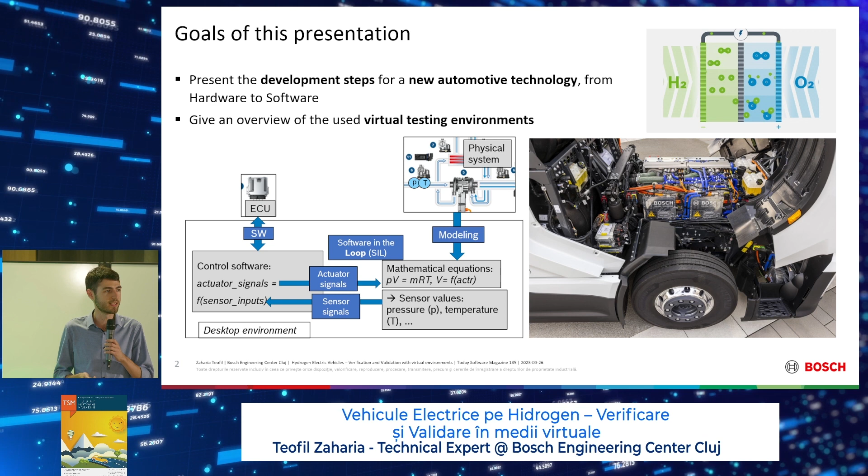The first point of our presentation is the great wonder of the 1950s: we can produce electricity from hydrogen and oxygen using a small electrical device called a fuel cell. Who of you knows this? Okay, few of you. We can also produce energy by burning everything - that's much more spectacular, but this is a very clean way of producing electricity.

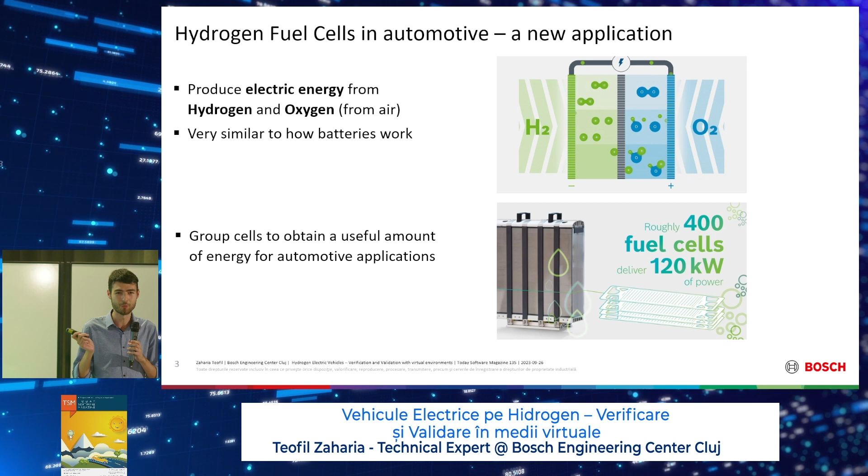And we just get water out of it and we don't produce CO2, so very green. They are very similar to batteries. What we can do is group a lot of cells like we do with batteries, and generate a useful amount of energy for vehicles. We did exactly the same thing with lithium-ion batteries, so nothing new up until now.

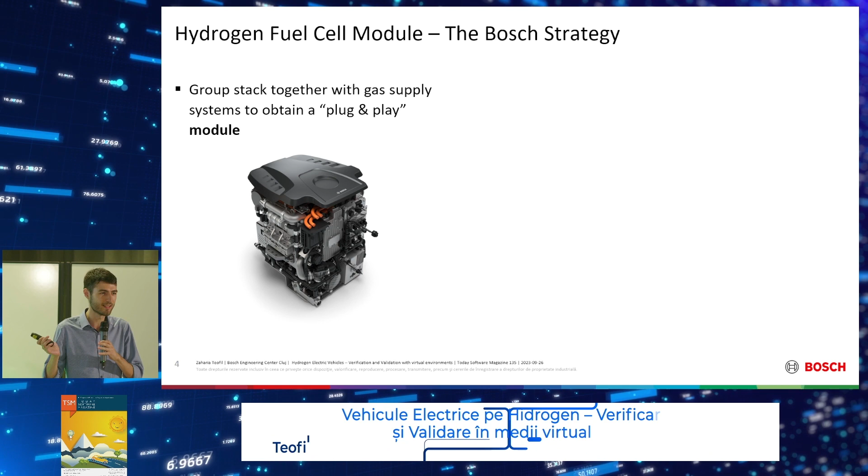But now we're getting to the really nice part. We can group all the systems together and get an engine, like for a vehicle. It's modular, and you can put it in a car and just sell it like this. Here you see one of the final results - that's an Iveco truck, you can look that up on the internet. Here you have the Bosch module, just put inside, and you get electricity. Just a module that generates energy. So it's a wonder, right?

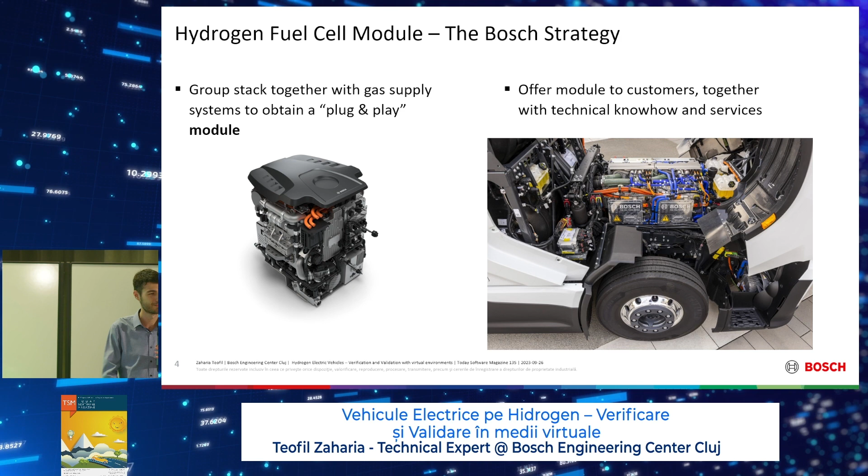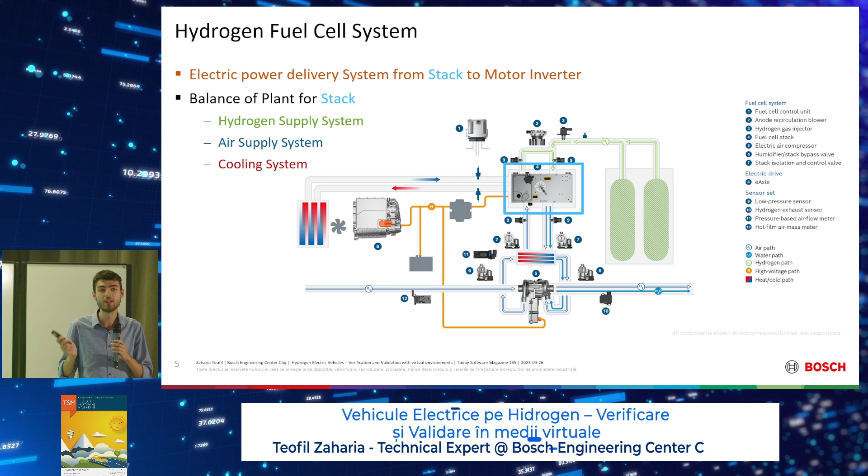Next, we have the air supply system. As said, you need oxygen that you get from air - it's very useful to live on Earth because you have oxygen in the air. Hooray for Earth. And then you need a cooling system like for an engine - this heats up really bad, like in a combustion engine, so we also need a traditional cooling system. In total, very similar to a diesel car - you have air, you have cooling, but what's new is the hydrogen.

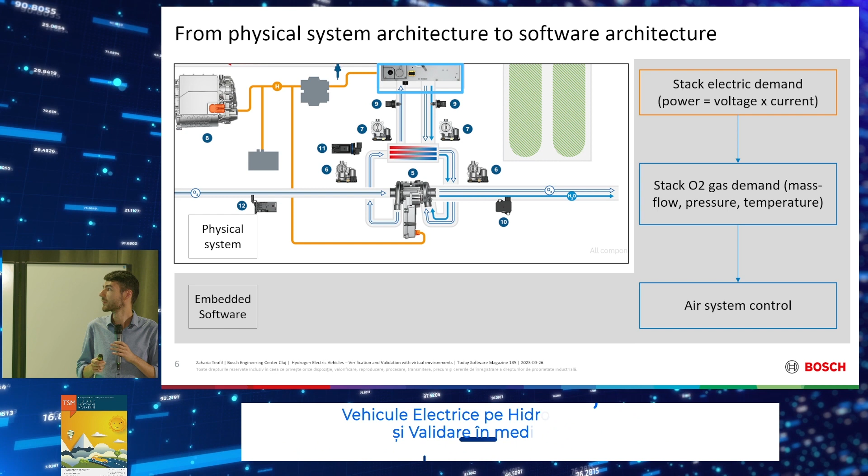Now we have the physical system. Next, we need to talk about software - it's today's software magazine after all. What's really different from maybe your field is that we have embedded software here. The final goal of the software is to control the physical system that has a lot of electric actuators.

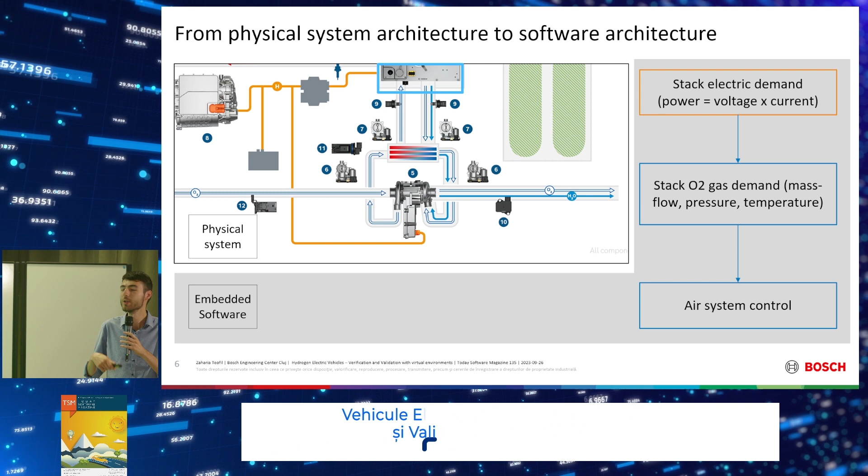Who of you is familiar with the term actuator? Okay, not enough - electric motors. Who of you is familiar with electric motors? Okay, thank you. So we have a lot of small electric motors inside the whole system that we can control with our computer.

There we have a software architecture diagram. At the top we have the main request to produce electricity. From that we determine the amount of oxygen and hydrogen - here in this case we have the case for oxygen. From there we determine the amount of air we need to produce enough electricity. From this we can command individual components.

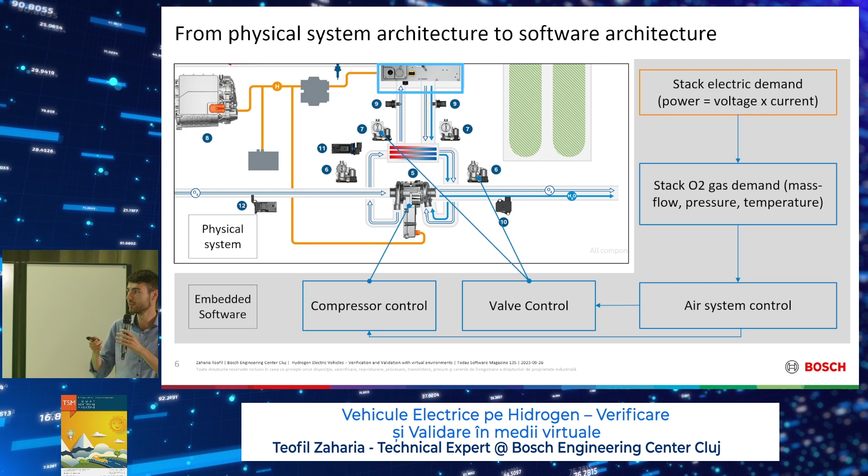Here we have the compressor - it's okay if you know what a compressor is, it's just a fan that blows air, basically. And we have valves that control the airflow to the stack. In general, we make a subdivision in the embedded world where we have component drivers and application software. But it's just another way of saying we have more abstract software and software which deals with the hardware parts.

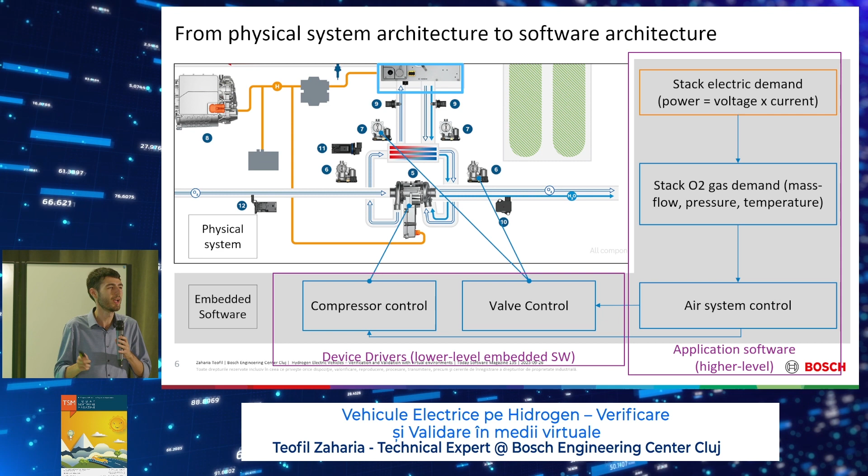So this would be the software architecture and how it controls the physical system. Everyone okay with this? Yeah, okay. It's like in the classroom - if one is okay, then everyone is okay.

This is our dreaded V cycle in the automotive world. This is how we develop software. It's a top-down, bottom-up approach, similar to normal software, where you do the architecture first and design the modules, and then you start implementing and testing. It's a little bit closer to waterfall, where we design the whole system at a big level compared to normal agile that you do in software.

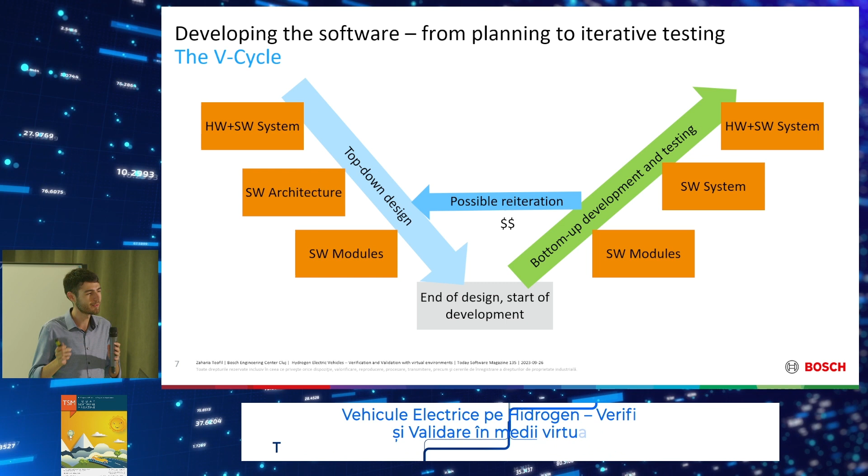But there's always the possibility for reiteration. What does reiteration mean? You spend money - spend money on developers redoing stuff because it wasn't okay the first time. It's great stuff, always happens. Good type of reiteration: you just need to redesign a module, something didn't go well at the lowest level, and that goes fast.

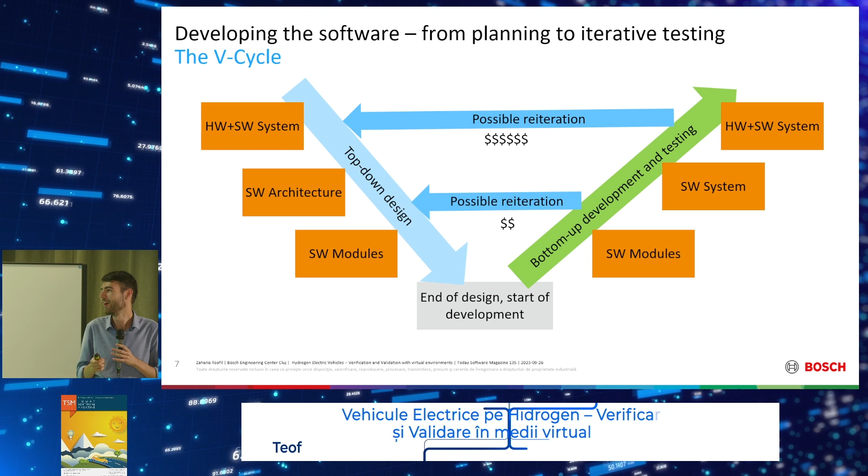Bad case of reiteration: you misinterpret the client requirement and you have to redo the whole thing from scratch. I see some people are laughing - I hope you don't have this experience. Okay, so best case you don't do this, but yeah, we live in the real world.

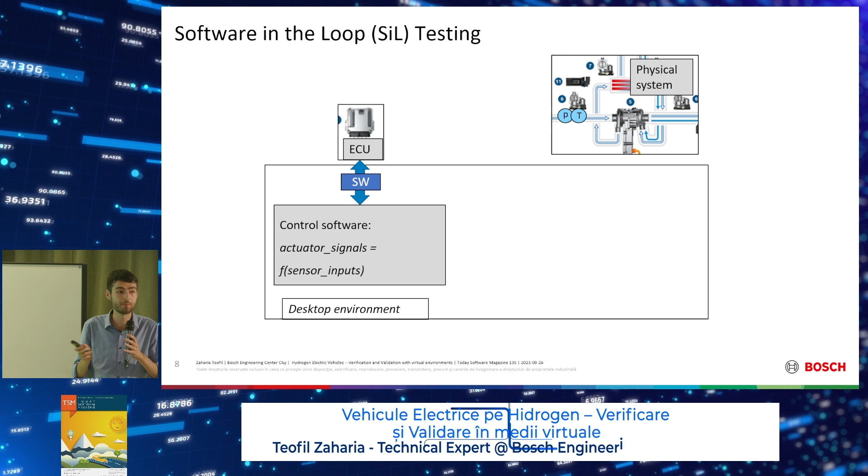Okay, how do we test our software? We develop it, we also need to test it, or yeah, let the driver test it and crash and burn or something. But okay, so we test it first.

The best way of testing is everything on the PC where you develop it. But there's a huge problem: we're trying to control a physical system, not the CPU and memory. How do we know our software is doing its task to control that system when we don't have that system? The easiest way is to simulate it.

We simulate the system by writing equations. We hope the equations are correct or good enough. Then we extract the sensor values from those equations, simulate the sensors, and connect that to our control software, and connect back the output from our control software to the simulation.

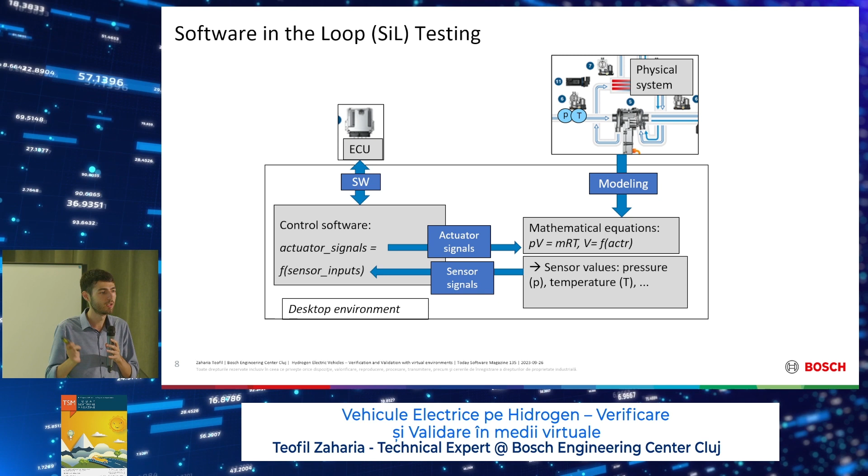This creates a kind of closed loop. That's where the loop comes from, where our control software on our PC is connected to a simulation on the PC, which we can use to determine if the software runs correctly. What does correct mean in this case?

Requirements. Do you like requirements? Raise your hand who likes writing requirements. Great, thank you. You're doing a great job for the world.

Please continue. From the requirement, very important, we derive the test scenarios to see if it really does the job or doesn't. In the best case, it does.

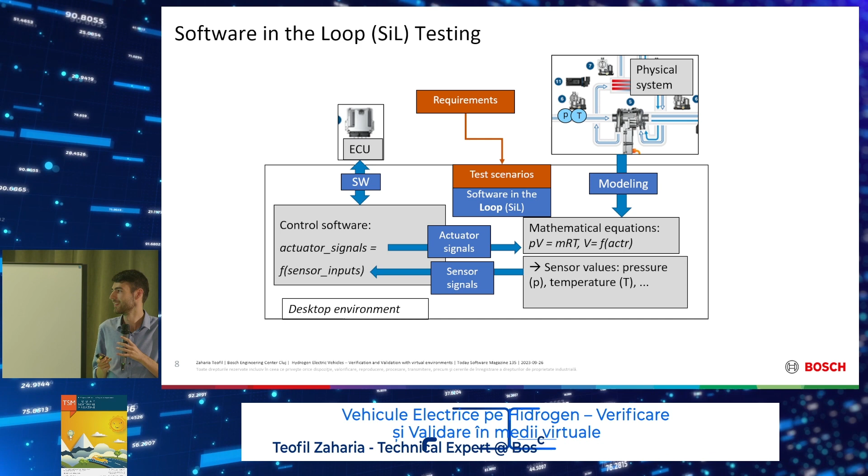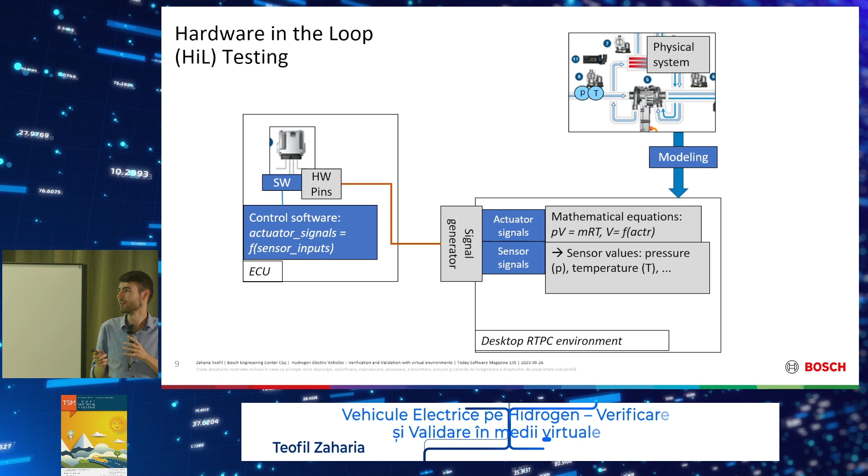Previously we had purely software on the PC. Now we're getting, not to the real problem, not the actual system, but a step closer to the system where we're using the actual embedded software on the embedded controller.

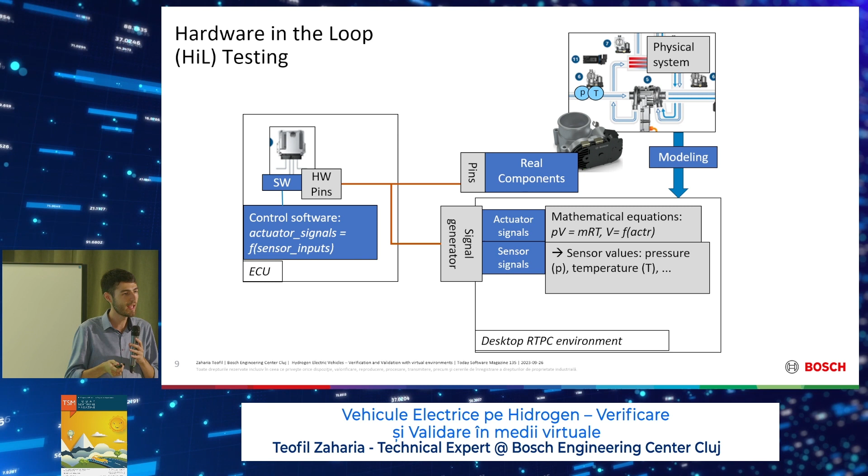And you see there, we still have the simulation. But why aren't we connecting it to the real car yet? Because we can really destroy that. Now we actually only want to test a part of the hardware. The part of the hardware we want to test, we actually connect it. We power it up, and we use the part which we don't have, which is expensive, in the simulation we had in the SIL case.

And this is called a HIL. It's a black box, a real big box. It looks like a set of drawers. Who of you works with server racks or has experience with server racks? No one? Ah, you have a few people. Thank you. It looks like a server rack. You have a lot of sliding boxes which you can exchange, and it draws a lot of power, more than a server rack, but still.

And you interconnect the ECU and the existing components like sensors and actuators to a PC that's running in real time to the simulation. So you have a lot of electrical components interconnected. This is a more expensive step, but yeah, it tests a lot more.

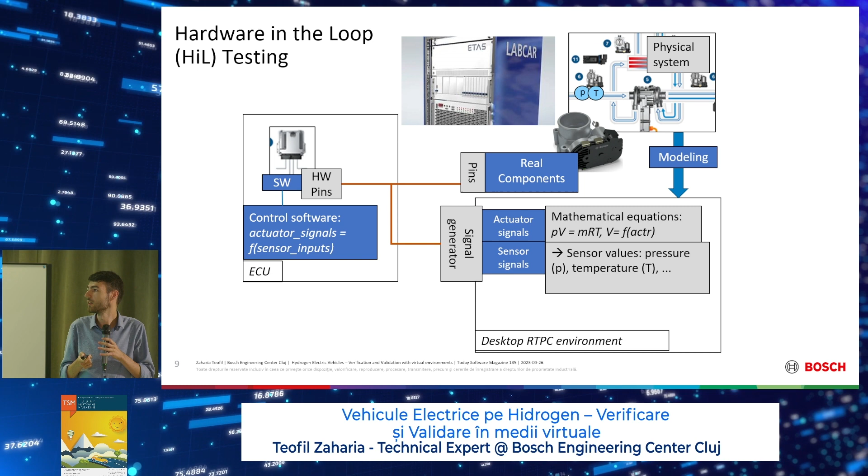Next step is car, but I'm not covering that here. A little bit about test automation and we're done.

Okay, we have requirements. A part of them are implemented. We write some tests, run the tests on HIL and SIL, get the test result. First iteration done, green, next. We implement more requirements, we create more test cases, we rerun the previous test cases, compile the test results.

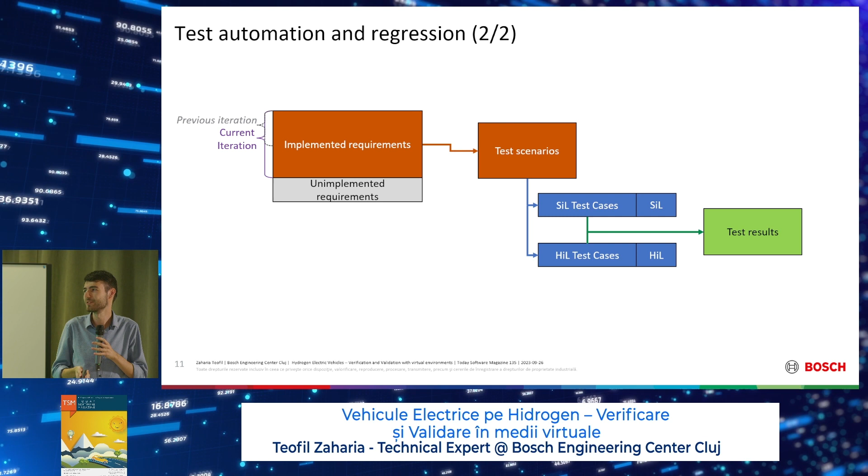These are legally binding. If somebody dies, somebody asks us for the test result. Not fun. And that's the end of the story. When you have all the requirements implemented, when you have them all tested, when you have the test results safely stored for a lot of years, then you can safely release the vehicle, people can drive it, and everybody is happy, and you're making a lot of money, and you don't have to work ever again. No.

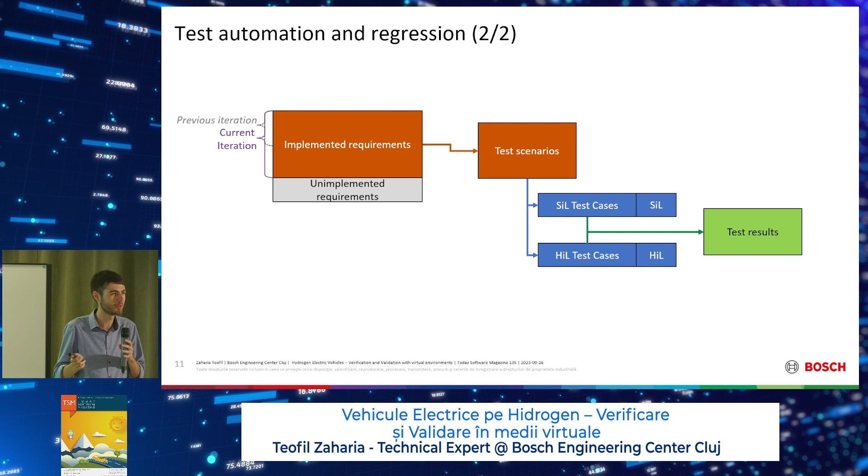Why don't we see hydrogen cars on the road yet? They're expensive, and we're not living in Japan. For normal consumers, not trucks, I think the cheapest one is 60,000 euros.

You don't have where to refill them in Romania, for example. In Germany, you only have some stations. And yeah, we're not building stations to refuel because people don't have cars. People are not getting cars because we don't have any stations, and they're still expensive. For trucks, it will look better because, for example, the EU is pushing regulations for pollution, and you can't make trucks with batteries, not really big ones, and that's why we'll have hydrogen trucks very soon, but personal cars not yet.

Is the security of the containers of the hydrogen really secure? Because I know that was an issue in the past, because they are highly flammable. Yes, the tanks are strongly reinforced, and we have a lot of emergency shutdown systems. If we detect the smallest leak anywhere, everything shuts down.